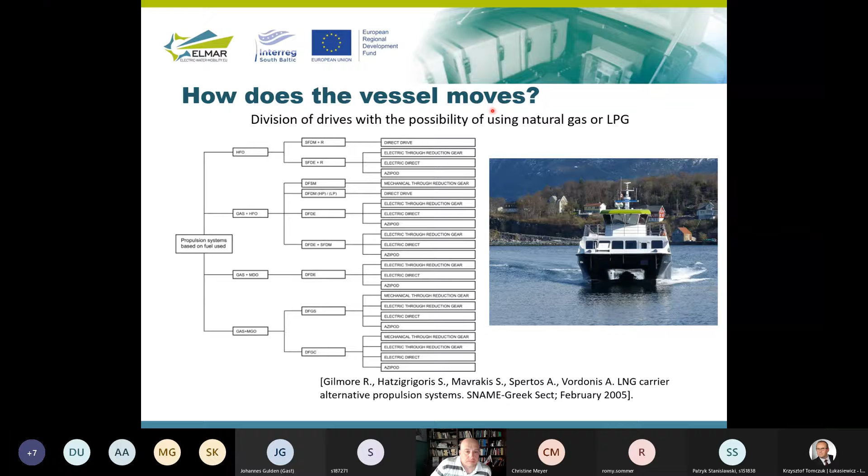So we see that there are three types of propellants. First of all is distillate fuel. This distillate fuel can be accepted in many special areas due to its low sulfur content, because sulfur is one of the most critical factors. Of course, this distillate fuel is far more expensive than heavy fuel oil.

So it must be adapted and introduced by law regulations. It's not like ship owners will say, yeah, it's better, so we will use it. No, we have to force it somehow. And this distillate fuel can be used in special areas like the Baltic Sea or North Sea.

The other option, of course, is using liquefied natural gas, LNG. LNG needs special handling, gives pretty good energy concentration, but must meet many other technical issues to handle it, and of course it meets the current IMO levels of adoption, called tiers, regarding nitrogen and sulfur oxides. And the third option here is heavy fuel oil, HFO, with some special treatment.

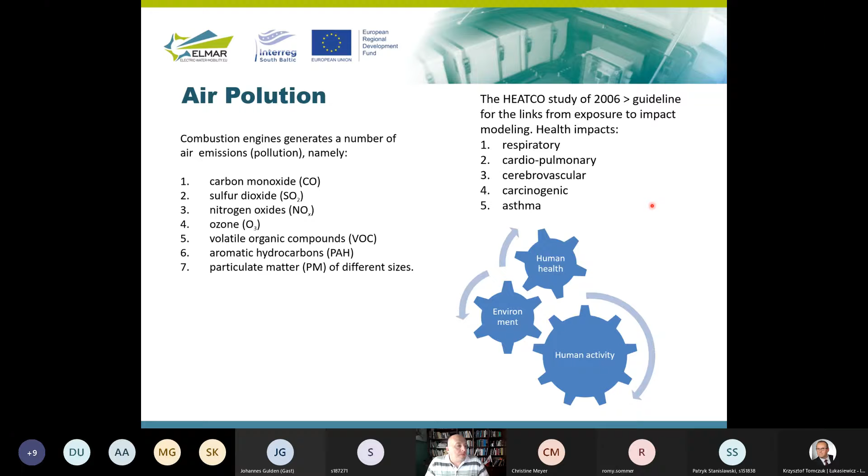And we are also dealing with the loss of environmental cleanliness. I believe all of us heard about PM, particulate matter -- very small solids inside the fumes. There can also be ions or reactive gases. Some of them can even be radioactive, some metals and carbon cores. So these are really nasty things.

We actually generate them using our facilities -- power plants, incinerators, etc. We generate them in any kind of typical engine. There are two classifications: below 2.5 micrometers and below 10 micrometers. For us, both are pretty dangerous, so we can say it's pretty problematic.

We know that in modern diesel engines, in road vehicles, we deal with them in many ways -- we've got EGRs, dust collectors, etc., DPF. These are the things that must be addressed also in shipping.

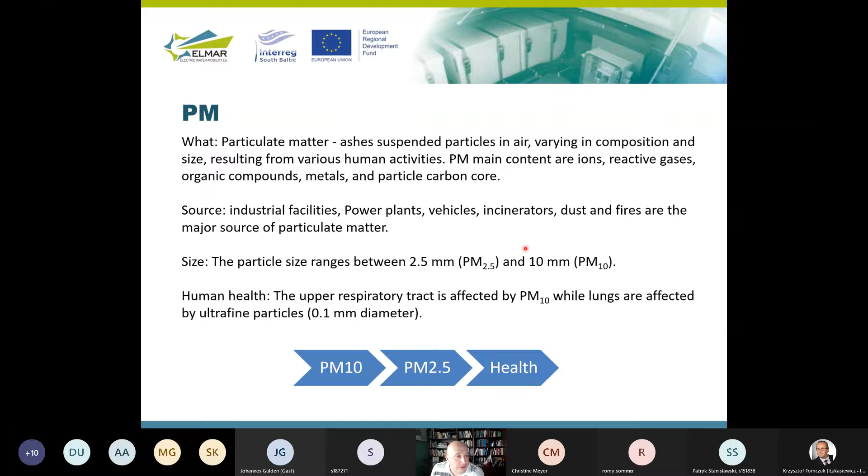What are the impacts on the environment? Here we've got the Canadian agency that has collected all of the impacts taken from fossil fuels to the environment -- what we do to our environment when we use the engines. I don't think we need to go through all of these elements, but you can find it here.

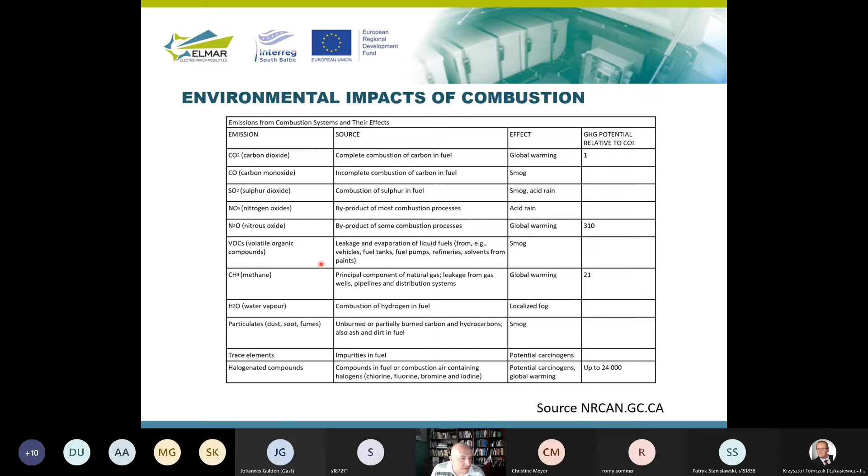First of all, of course, apart from our health -- we are inhaling this into our bodies -- we get global warming from the CO2, smog, acid rains, and global warming again from the nitrous oxide, and different things that can affect us. What are the sources? Of course, here we've got the sources: the carbon itself, the hydrocarbons, content of sulfur, so we can avoid it. The temperature of the combustion is also a factor here.

Who is the largest emitter of greenhouse gases in maritime transportation? Actually, it all depends on the size of the fleet, and we get the fleet of Panama, so it's the largest player, then Liberia and China. All others are, of course, 65%, but these are the three key players now.

Of course, Panama and Liberia are so-called cheap flag states. So they only have the vessels registered there, but the owners are, of course, not residents of Panama or Liberia or Bahamas. They are residents of Europe, residents of the US and other sides of the world. So is it like that Panama is responsible? No, Panama is just the flag. So we have to take care and address this. IMO got a huge problem with these cheap flag states, after it has been shown that the owners of the vessels are somewhere else.

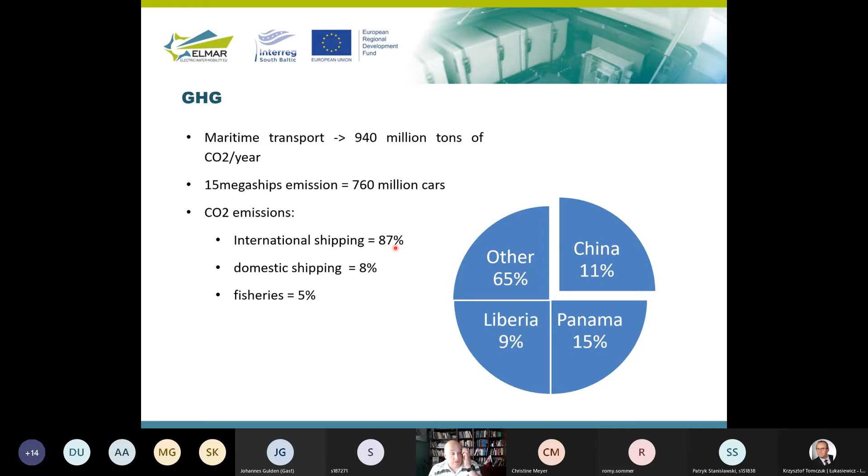What MARPOL measures are introduced? First of all, EEDI, the Energy Efficiency Design Index for new ships, and it is mandatory on the energy efficiency level. But for existing vessels, because most of the vessels in international trade are existing, old ones, they got something called SEEMP, the Ship Energy Efficiency Management Plan. Here, both new and existing ships must comply through operational measures. So also meteorological routing to spare fuel, optimizing the draft, speed optimization, and of course calling, entering the port in the proper manner.

Also, the efficiency of transportation, as I already mentioned, through the water is the most efficient one. It's the most efficient despite the high emission from a single vessel, because one single vessel can have thousands of containers inside. So this transport efficiency in grams of CO2 per ton per kilometer is the best one. The least efficient is aviation.

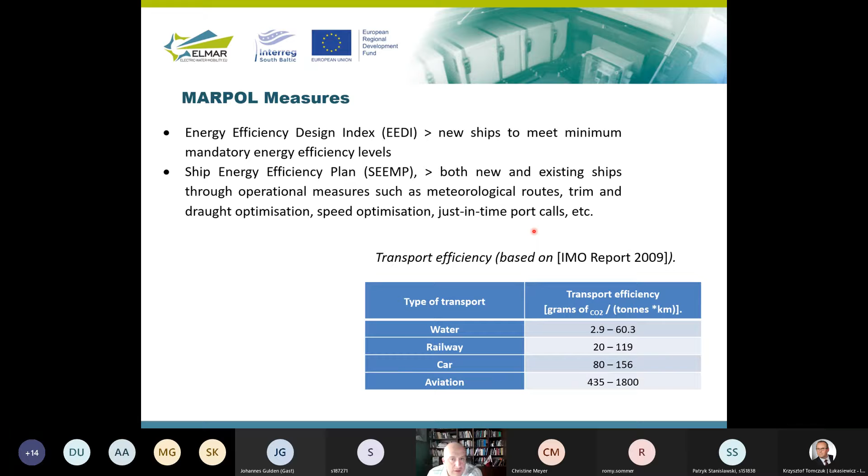MARPOL action to reduce carbon intensity is, of course, introduced for new vessels, as we already said, and for existing ones. This action is to reduce CO2 emissions per transport operation on average by at least 40% by 2030. 40% by 2030 is a really huge number, and most specialists say it might be done, but this is just might. And going to 70% by 2050 in comparison to 2008. So it's a really huge number for the environment. If it will be achievable, I have no idea. We will see. Greenhouse gas emissions to be reduced by at least 50% by 2050. This is also a really big number.

What can we do? Of course, we can introduce cleaner fuels. One of these is natural gas, which is nearly pure methane. It produces less nitrogen oxides, sulfur oxides, and PMs. It has less hydrogen and carbon than diesel fuel, so these emissions are also lowered. And the amount here is also related to the combustion. LNG or CNG has a lower price per megajoule, so it's more energy efficient. But storage is a problem, for long distance vessels in international shipping it can be a big problem.

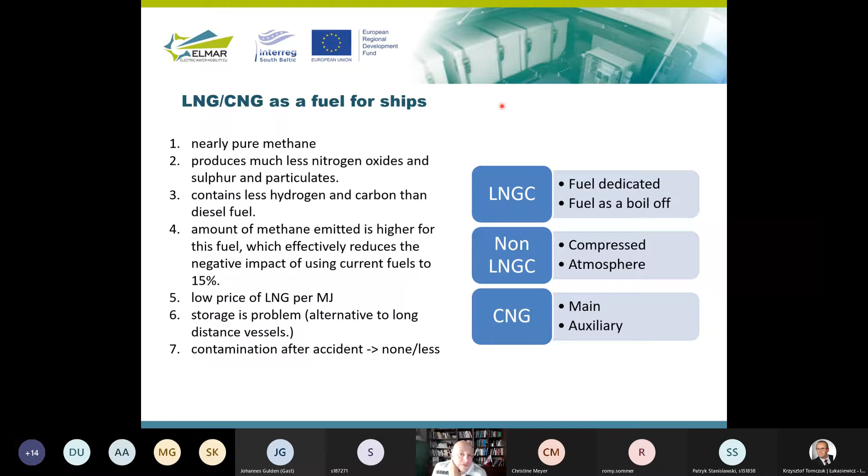What can we expect from LNG? We can expect, especially, PM reduction at the level of 90%, greenhouse gases around 25%, NOx around 20%, and SOx nearly 95%. So it's really clean fuel. Cleaner engines, cheaper maintenance. These are the biggest advantages.

Output efficiency, easy storage. Maybe not an issue here, because it's not that easy to achieve the easy storage actually here, and pretty fast refueling, fast and clean.

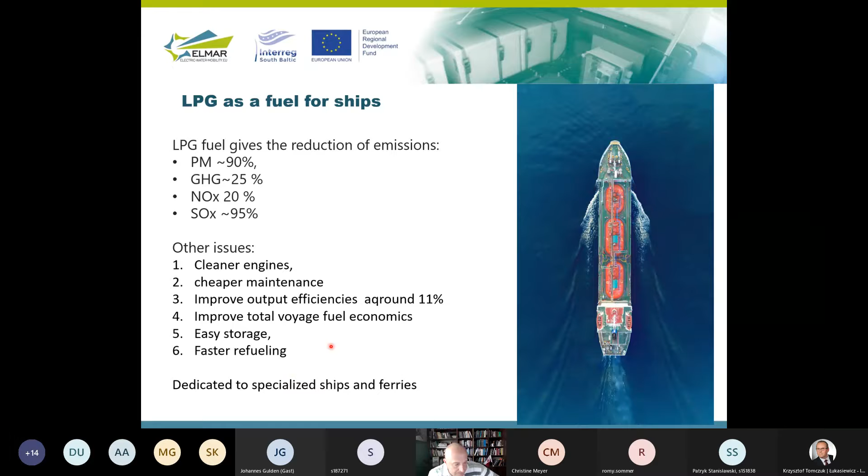Another type of reduction measure, I would say, is using biocomponents inside the diesel. So we are not using something that is purely made by the plants, but it's just an addition to the diesel fuel. Of course, the diesel fuel cannot be heavy fuel oil. This must be some kind of marine gas oil, so a very light one, or marine diesel oil, so also lighter than the HFO.

So we got a few methods of additions. So the bio additions, we got fatty acid methyl ester from the different types of natural oils, which also can be used here, and this marine diesel has an appropriate ISO standard up to 7% in volume.

Also, two different methods. So the BTL can be also used for the diesel engines. Different type of processing, and HVO, vegetable oil here, also can be treated inside the marine diesel oil.

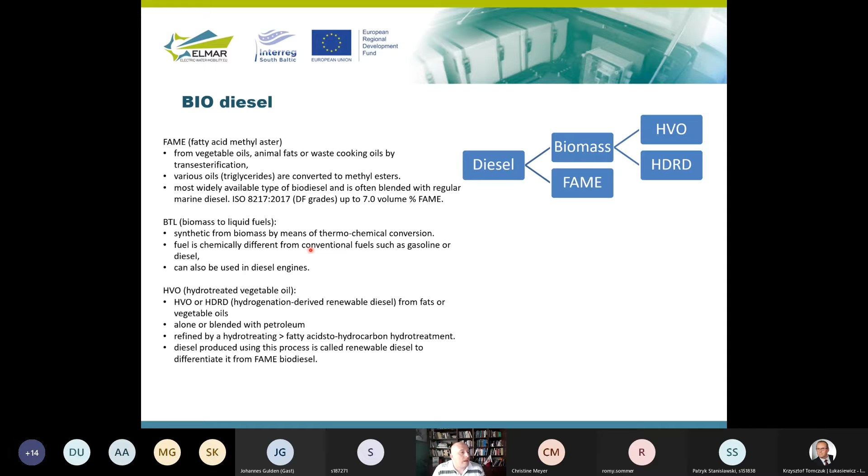But nothing is for free. We got some disadvantages and some challenges, I would say. So bio additions are more reactive. So in high concentration, they can react with some types of gaskets and different alloys. So the designers have to take care of it.

Problems because these are natural things. So we can have some microbiological growth and different problems here, and degradation of it in due time far faster than the typical diesel oil. Also, corrosion here is another issue we need to address. And the low temperatures. So not every biofuel component can be used in low temperatures, like Arctic shipping and our areas when it's cold.

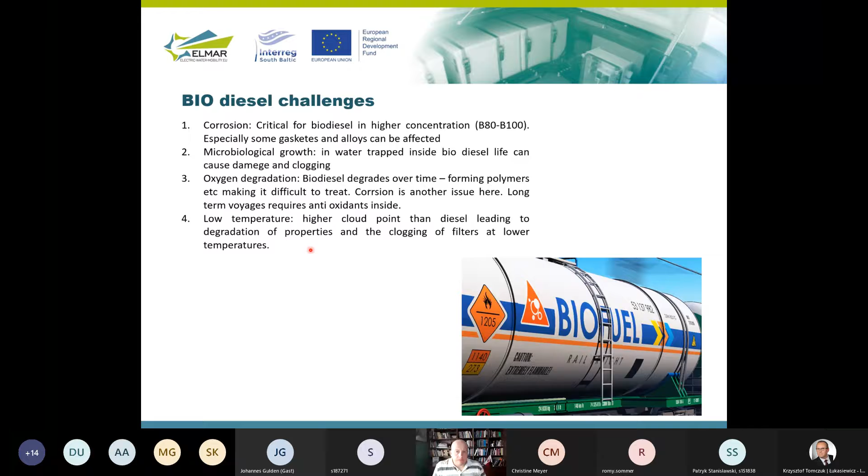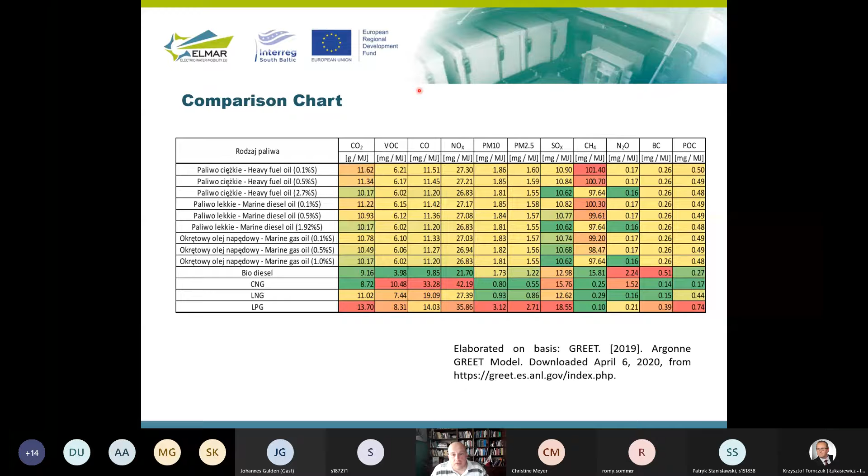Something that we did not address was LPG, so liquefied petroleum gas. So a compound of propane and butane, because it's a standard that was not actually very widely introduced. There are some vessels propelled by LPG, but these are not standard because they do not meet many emission types, and it's not that common.

So going into some discussion, we have to look at the LNG fuel. So LNG fuel, is it something that will become a large player? This is the question. It's rising in many sectors, but still a very low amount of vessels are propelled by LNG. LPG, as I said already, is a standard that was not introduced.

Biodiesel is a good idea, and it adds a lot of advantages to cleaning the environment. It has some issues, but still biodiesel in large engines can be successfully introduced. And problems with the legislation. So at the very beginning of this presentation, I already mentioned this problem. So the international regulations, then the national regulations, and then we got a lot of regulations.

But is it really something that we must obey? It's a question. Of course, the international regulations must be met, but if there are too many, then of course it's not really wise for us, and it's not really feasible for us to deal with.

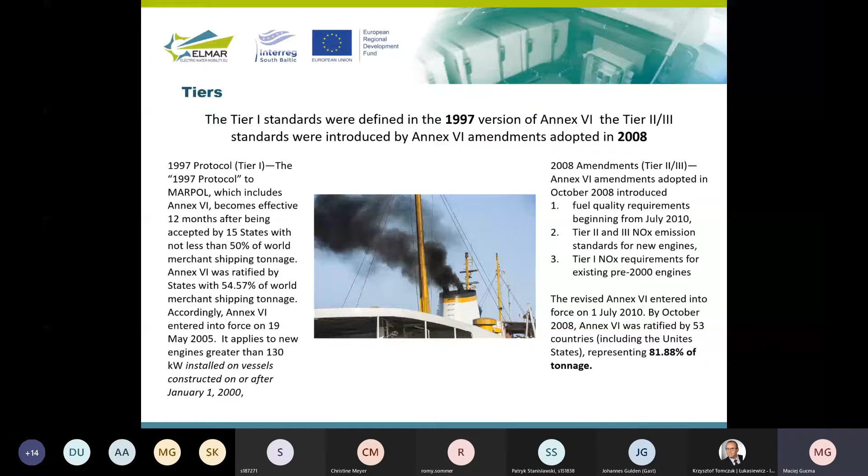Okay, so what are the emission control areas? I already mentioned this in the previous presentation, but the emission control areas are defined in Annex 6 of MARPOL. So these are local areas, the local waters of some parts of the globe, where stricter requirements are applied to the vessels in case of any emission.

So these ECAs: the Baltic Sea was really early adopted, one of the first basins. We all know, because we live here, how fragile the Baltic Sea is. So we have to really take care of it and share it with our kids in the unchanged state. So this is the idea. SOx adoption was really early, in 1997, in 2005 it was enforced, and NOx is entering now.

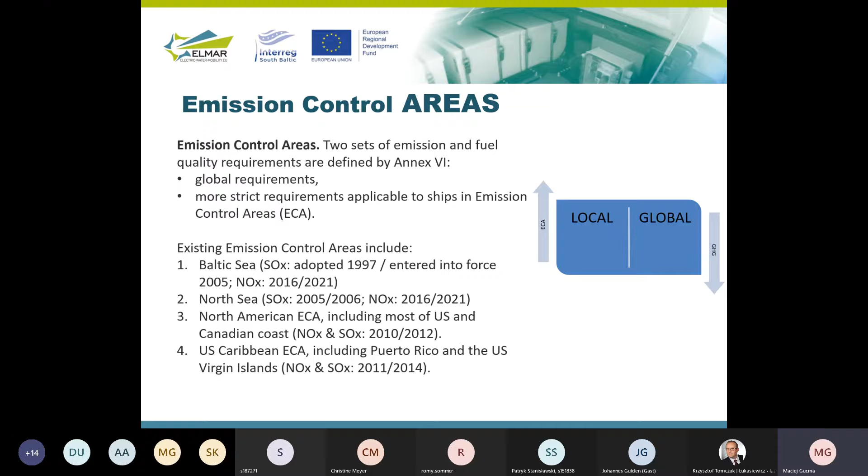Similarly, it's for the North Sea, also North American, they got ECAs for the US and Canadian coast, and the US Caribbean ECA is of course introduced by the US because it's their territory, Puerto Rico, Virgin Islands. The global concept is mainly lowering the greenhouse gases emission.

We got the greenhouse gases regulation on the efficiency for ships. We already touched it in the previous presentation. These limits apply for diesel engines with power output of more than 130 kilowatts. So this does not affect the really small leisure crafts. This is more for trade and shipping. But of course, the countries themselves can introduce stricter regulations for shipping and for leisure craft.

Is it okay or not? We will discuss it at the end, maybe.

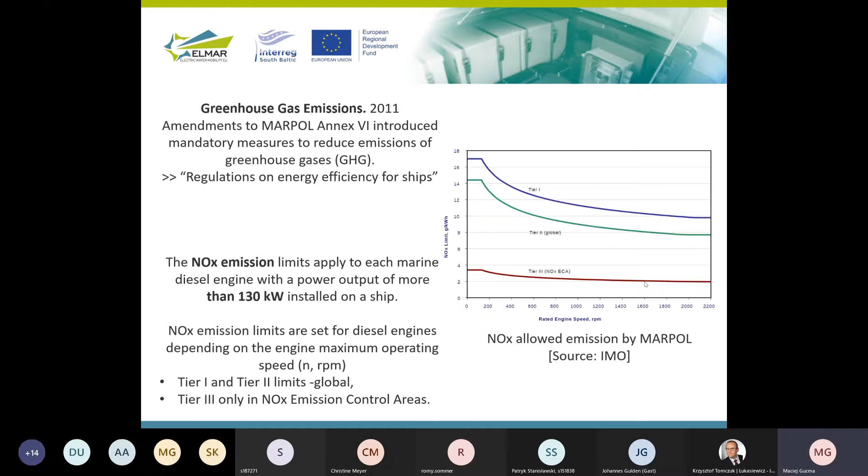How can the sulfur oxides in the fumes and sulfur in the fuel be lowered? First of all, using marine diesel oil. Distillate fuel is far more expensive than heavy fuel oil. And second is scrubbers. So we also talked about the scrubber, the exhaust gas cleaning system. And 0.5% is our target.

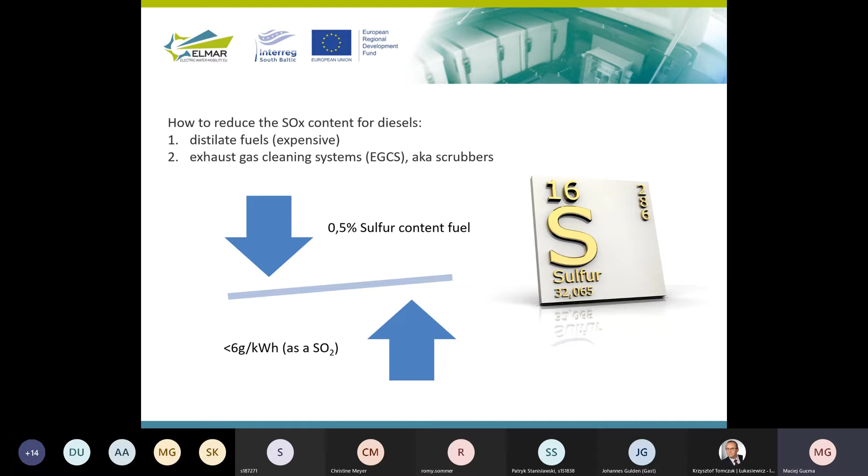So what we can do from the technical means: large combustion engines are dealt with solely by MARPOL, with a scrubber or conversion to another fuel. This conversion, of course, requires a lot of changes for the big engines. Converting to LNG is a big challenge. So these are the large engines.

Medium engines, around this 130 kilowatts, can be affected by both MARPOL or the Euro standard. We got Euro 6 versions now for the new engines, and here we might assume that the typical solutions from the automotive branch will be fine, like EGR, exhaust gas recirculation, DPF, the particle filter, and other cleaning means.

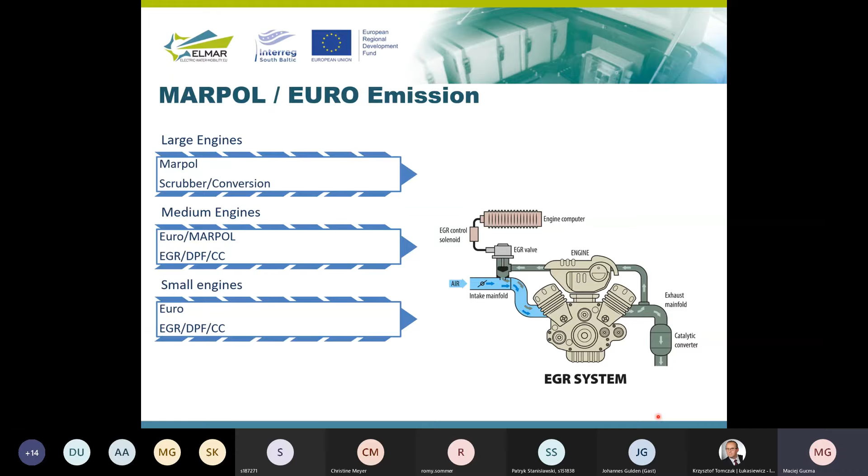EGR valve here, presented as a mixing valve, so anything that can be found inside the exhaust gases here. I will just show exhaust gases here. They are combined with the intake air to the manifold, a system known from the diesel engines in cars. And of course CC, catalytic converter, as a purification, the simplest system we can have now also in diesel engines on smaller crafts.

What we got for the emissions, we got SOx and particles. SOx and particles are treated by the DPF filter, so this particulate filter that must be cleaned occasionally, like in the cars. Diesel oxidation catalyst, so we get this catalyst. Of course, we are not discussing here the marine gas oil. So I would say that the light fraction of the hydrocarbons here are not taken into account, only diesel oils. And the third one is continuous regeneration trap, CRT.

For the NOx, we got this SCR, so selective catalytic reduction, pretty complex thing. EGR, of course, is helping with NOx emissions, just by recirculating them to the intake manifold. Non-thermal plasma, so another new means. And lean NOx traps here is the fourth option.

What were the tiers, the Euro levels, beginning from Euro 3, 4 and 5? We got this comparison. These arrows indicate the years of the introduction of each technology. So for example, DPF as obligatory means here reduces this level of NOx, for example. I recommend this article. Here is also the link for it. So any of you, ladies and gentlemen, interested in the details, this article gives a lot of details on these technologies.

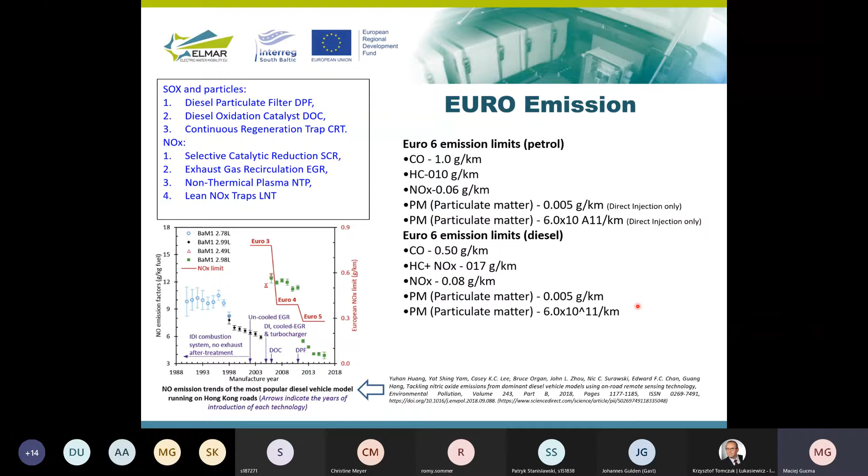For the Euro 6 emissions, we got the following numbers for the petrol, so for smaller engines, and for the diesel, we can assume these numbers here.

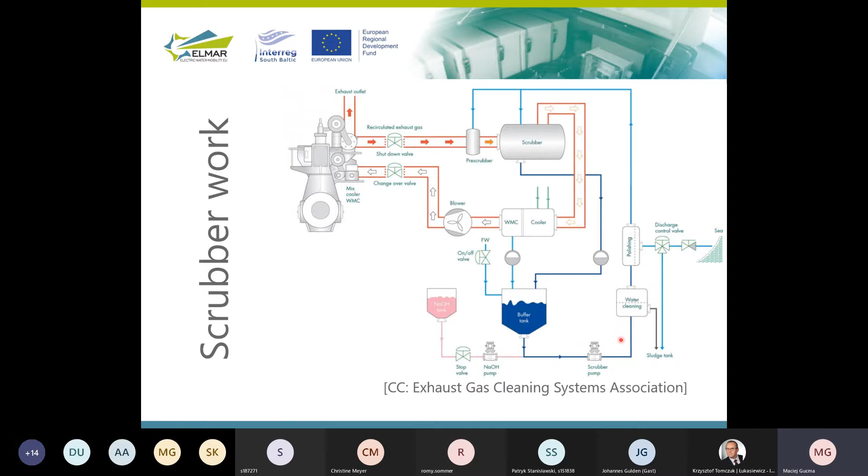Of course, as you can see, it's really complicated. Typical installation of this system for a bulk carrier of 80,000 tons is something like $5.5 million, which is a really big amount.

The proposed solution, of course, is a change, not going a step back or standing in the same place, just using some purification. But of course, the change we have also got in our discussion. So from diesel to LNG or hydrogen. These are the possibilities. Using fuel cells, or solar cells also for the smaller craft, is an option as well.

Pure electric ones must be somehow charged. And if we remember the first presentation, there was a comparison between energy production and transportation. So if we produce clean electrical power, that is really nice. But if we produce this power from coal or from gas, etc., it's not pure. The level of environmental impact is the same. So maybe it's a bit harsh, but we always have to think, where does this electricity come from?

And biofuels, as we already discussed, have some advantages. They can be used, but they're also not the best idea. LNG reduction, we already got it. The possibility of retrofitting engines is not cheap. It's not like we will just put in storage with the LNG, set it to the injector, and we will have the retrofitting. Not all engines can be changed. Not every single construction can be changed to LNG. Sometimes these constructions are pretty old, or they are just not feasible to be changed.

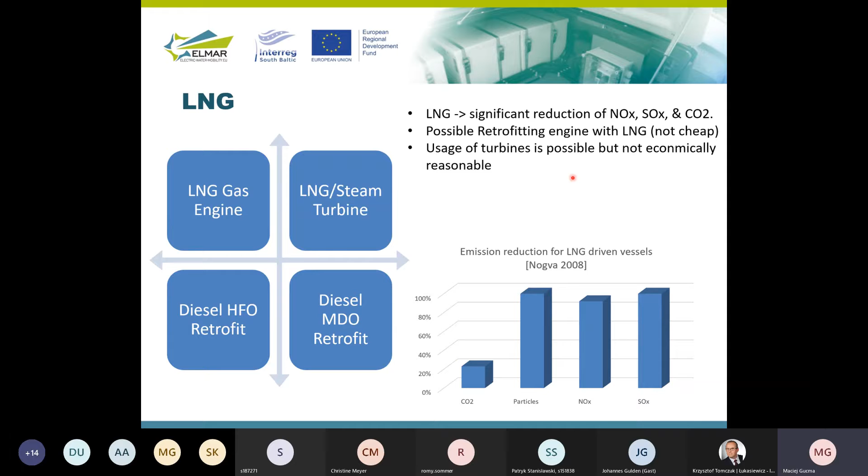LNG sources. So we have storage, some gas station. It must be done locally. Problematic. Many different things must be met to store the LNG locally, in some kind of gas bunker station. Another option is, of course, bunker barges. Bunker barges, so a small vessel with LNG inside its tanks, can just moor to the vessel propelled by LNG, and then it can be bunkered, like typical bunkering done now for vessels driven by heavy fuel oil.

LNG trucks only in ports, so this is done now. Our terminal Świnoujście is exporting hundreds of trucks with LNG, not only for vessels, of course, but also for typical installations, houses or facilities. And so this is the missing link. If we didn't have these trucks, driven, of course, by diesel oil, we would not have the advantage of LNG propulsion for the vessel, because there would be no facility.

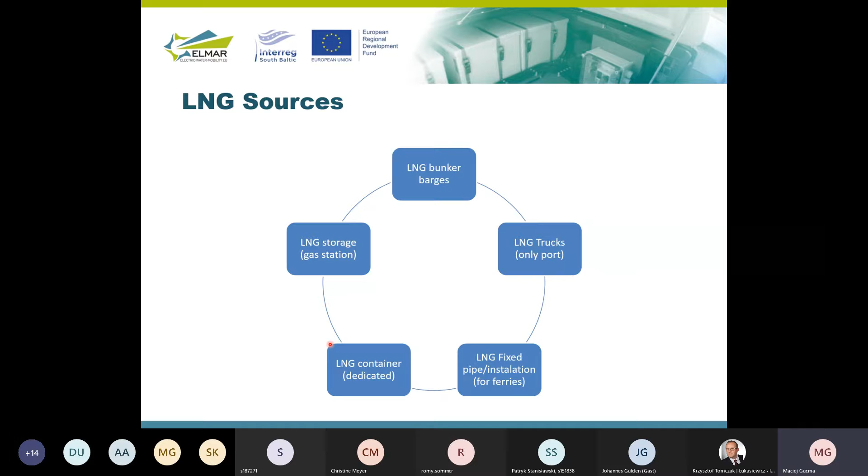Fixed pipe installation is only feasible for ferries. Sweden was the first country to introduce this. It is not feasible when you don't have a ferry, I would say a tram or bus going through the sea. And LNG containers, special containers that can hold the LNG inside for many days, are also a new technology, and it's rising now.

Hydrogen. Okay, so we skip from LNG to hydrogen. Hydrogen itself requires diesel forced injection, so the addition of hydrogen to the diesel. Another option is hydrogen/air mixture injection, and pure hydrogen gas engines.

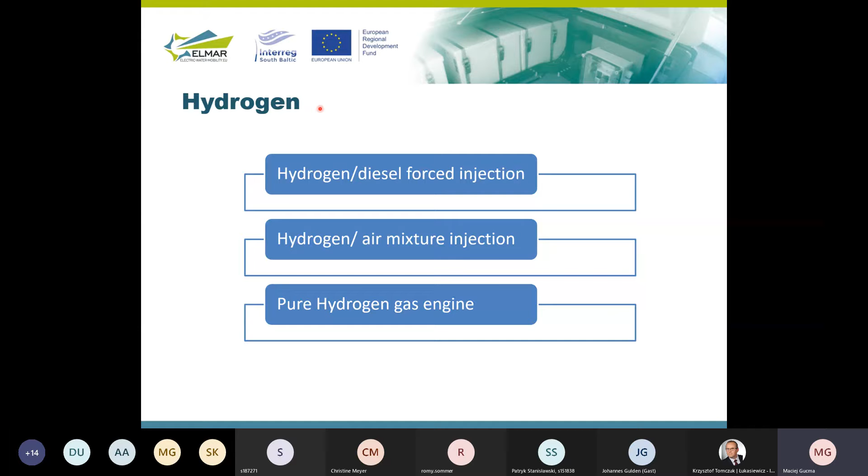The questions here are, of course, durability, safety of storage, performance, and cost. Scientists are building larger and larger fuel cells. Different technologies are emerging, so it's an open question if it will really give an advantage to our propulsion. Solar power is nice until you have power, of course, until you have sun.

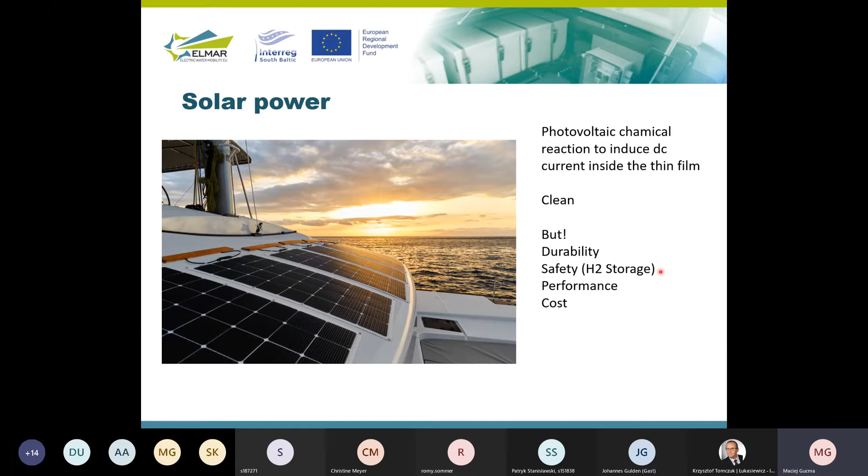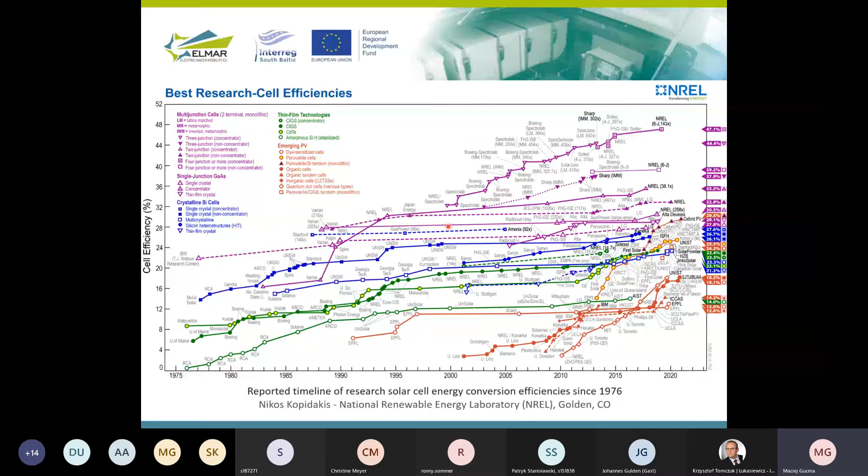What are the cell efficiencies? We can see the big giant leap, I would say, was done from the early beginning of this technology. Now the cell efficiency is rising up to 47%, so it's really high, I would say. This comparison is also very nice for students and researchers that would like to see the promising technology in this photovoltaic types of generation of power.

Pure electricity of the grid, again, nice, clean, looks good, no fumes in the place of using the power. Again, the cost of accumulators and batteries, the safety of storage is a question. Technology of storage is a question, and where do we take this electricity from? This is the largest question.

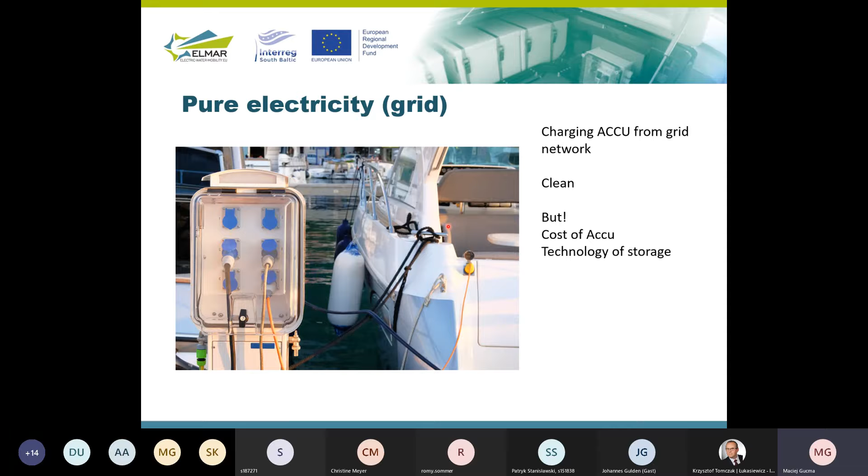Biofuel, we already got, I believe, at some point. So adding this methanol to the engine is another option. Biofuel and then methanol or esters to the engine is another option. Some reduction is met, but we're still in the same point, still in the point when the internal combustion engine is used.

So the discussion here is, of course, the features of the MARPOL requirements, small engines, Euro norm versus MARPOL. LNG, is it the fuel of the future? Maybe no. And electricity, yes or no.

We prepared some references here, so I encourage you to study them in original. A lot of files and resources can be found on these pages and papers. From my side, I believe that's all on this topic.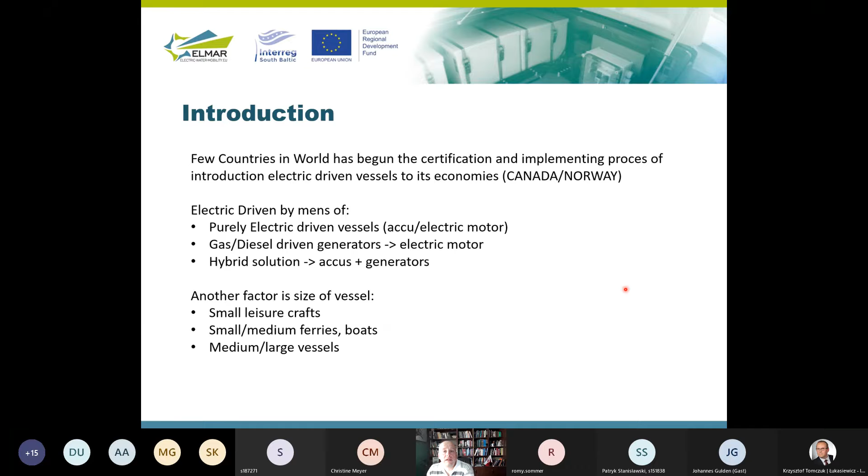Scope - we were considering with my co-authors how to scope this issue, because if you've got MARPOL, you have to scope it, because we are signees of the convention and we have to follow MARPOL, so there is no choice, fortunately. But how to scope the electrical driven aspect? Because many different parties say, yeah, you have to try, seek, and then do it. Mainly we are here now because of this action, which is really brilliant and desired. But what is the scope? The scope is pretty simple.

If you live in a coastal area or on an island, you have to depend on the ferry for transportation. If you live in a country that has exchange with another country through the sea, you have to depend on transportation of containers, goods, bulk cargoes, etc. Living in this coastal area or island can be the triggering action to see if it's possible to lower the pollution from exhaust fumes and gases inside the port. Even small vessels, but in large amounts, like Amsterdam, which Krzysztof already mentioned, can induce a lot of harmful substances inside the port, and then living standards will be lower, which we don't want. We want to live in a clean environment.

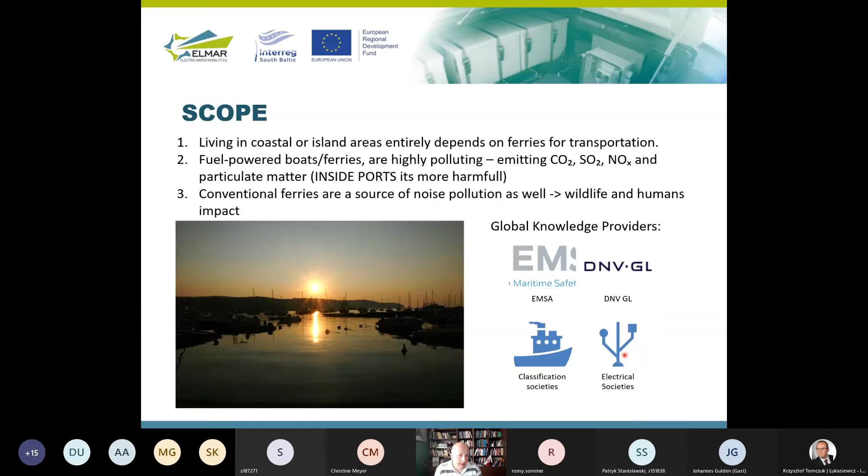So what can we expect on this EMSA cost benefit matrix? This is a really valuable source I already mentioned. The basis is using pure electric energy in the way it's done. So what are the savings for the vessel if we switch to pure electric energy?

EMSA together with DNVGL found out how to show the potential of saving fuel, when the payback will happen for this retrofitting and changing, what are the main considerations for the batteries, and then what are the main factors for maximization of this impact. Not every vessel can go into 100% saving - some of them are pretty low amount, I would say.

But again, the ferries are the biggest players here, and the relevant vessels like high-speed ferries and similar are the key beneficial here. But other vessels as well, so it's not only the ferries.

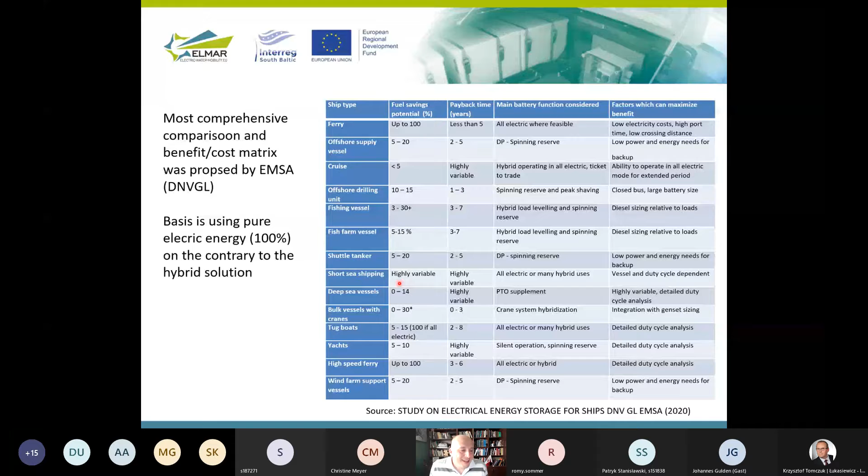What we deal with in batteries is a balance - the balance in power versus energy. Of course we all know that it's more or less we can find this energy consumption rate, and this can be optimized somehow.

At my university, we are dealing this for the small leisure craft we built with the Aranet consortium with a Turkish partner, and it was really demanding to find the proper cells for the electrical driven yacht.

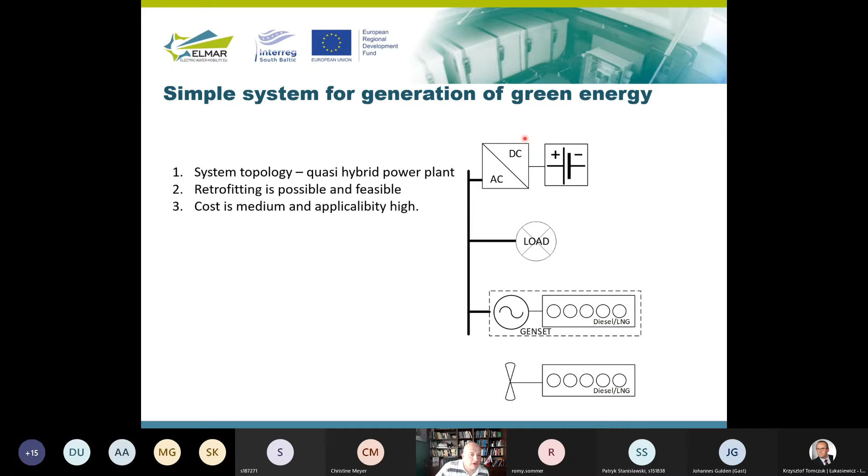Electrochemical sources. So the true hybrid, the real hybrid. So we got propulsion made from electricity. If we combine with this, the propulsion is made here from the diesel. So it's not for propulsion, just for conserving the power to the load. And here we got the propulsion made from the electricity, from the grid.

Here we got two segments of grid, we got two gensets, and we got two storages, of course additionally some loads, but here the grid is combined with the electrical motor, so the genset can be driven on a desired level of energy production. The load can be fed, and the batteries can be loaded at the same time if there is not high demand for electricity in the grid for the propulsion, which also can contribute to energy saving. Actually, I would call it eco driving.

So a hybrid power plant retrofitting is possible and feasible. A lot of vessels actually are using this side. If we just use this part, then a lot of vessels are driven like this. In the first presentation, we got this topology mentioned. So retrofitting is possible and feasible, but the cost is high. Applicability, we call it medium.

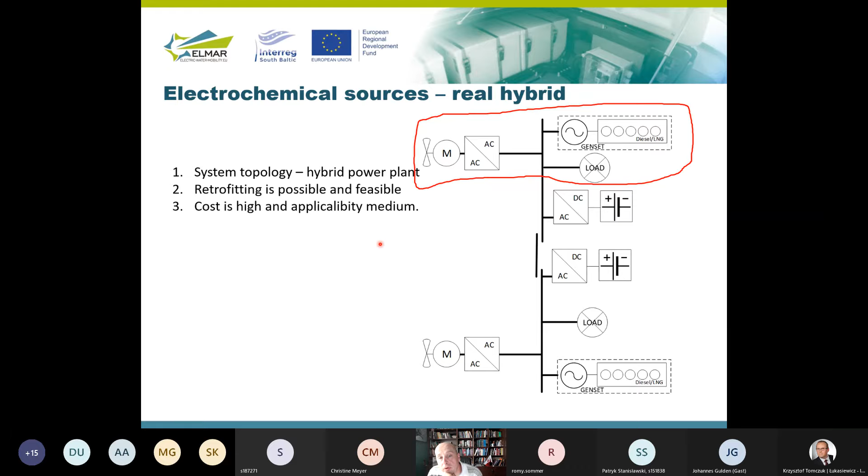Another option: having fuel cell in line. An idea also driven from the DNV GL. So this hybrid power plant is fed again from the genset. We don't have the batteries here, but the genset is driving the electrical motor. This is additionally supported, I would say, by the fuel cell. Hybrid power technology retrofitting is demanding. It becomes demanding because of the fuel cell.

But again, this part can be existing, and it's met on the vessels. We got costs at the high level. Some losses in generation can occur because we don't have the place to store it, and it's feasible for specialized vessels like DP operational, some standby tankers, etc. It can be feasible to have an additional fuel cell in this segment.

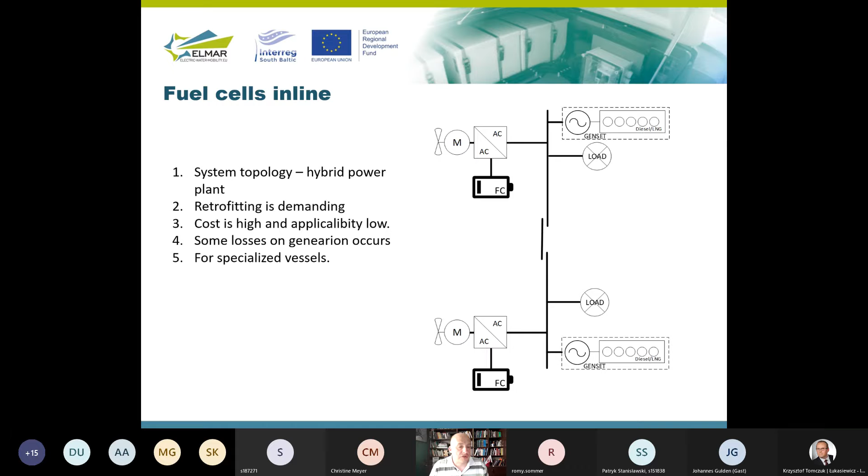And adding a fuel cell as an additional segment in the grid gives more advantages. We still don't have the possibility to charge it, but we can of course combine these segments together and use only one engine for eco driving, for example. Retrofitting is possible again, but very demanding. Applicability is the same, so it's medium.

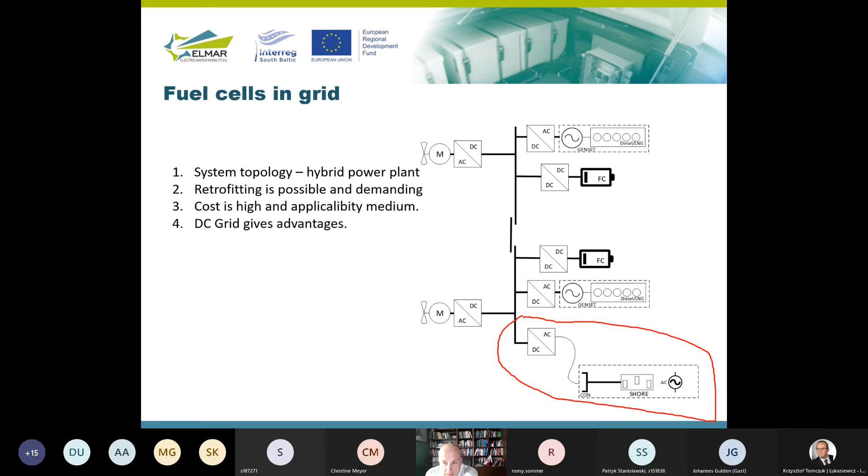But there is one more segment we didn't have there. It's the segment where we can connect to the shore, so using this fuel cell inline with the grid together with, not at the same time of course, the shore power connection.

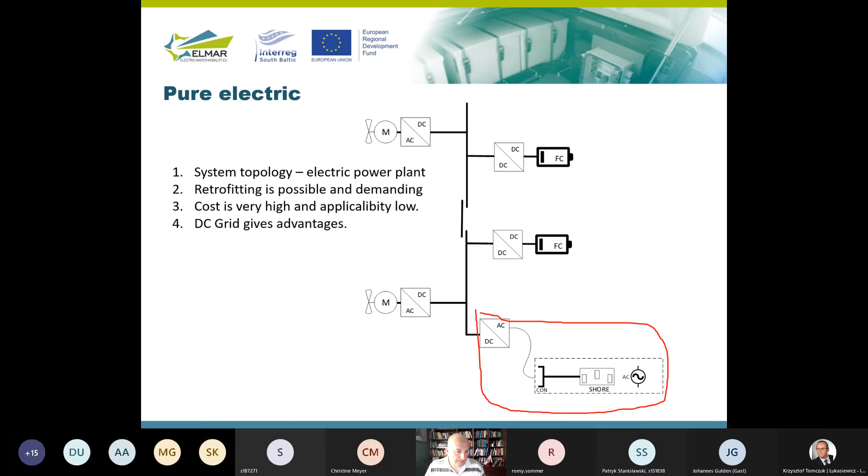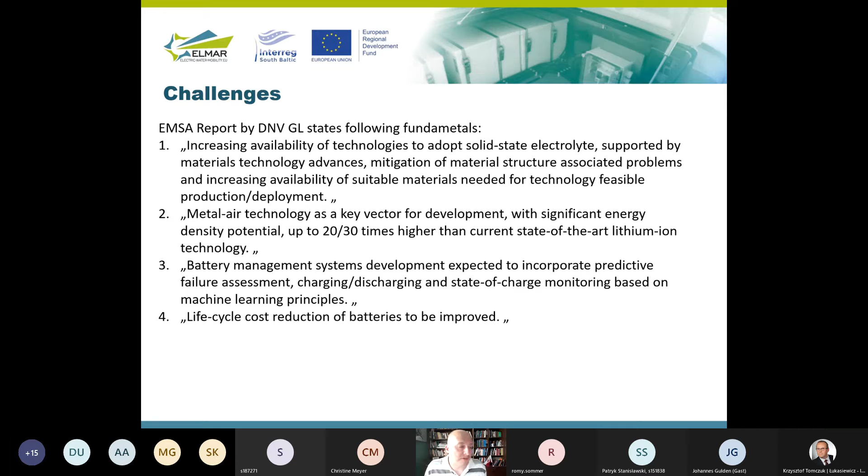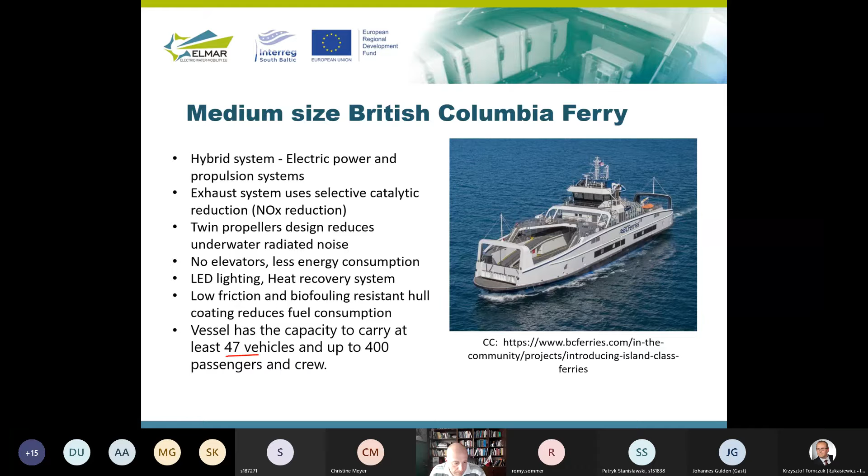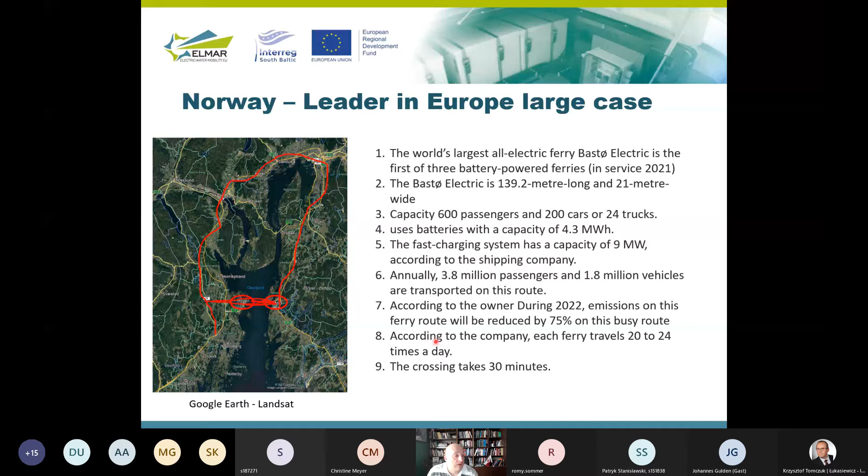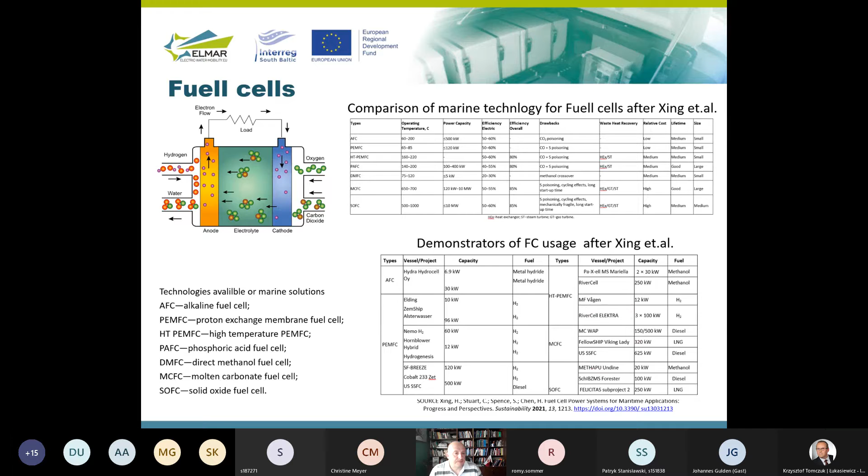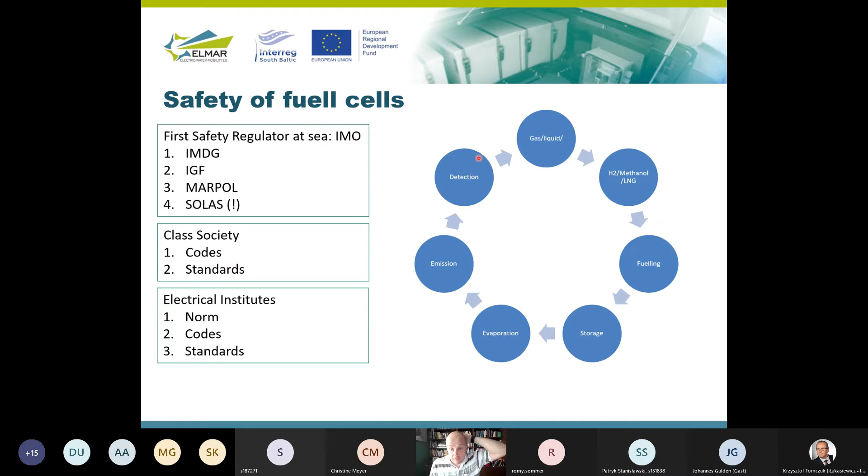So discussing, we can think about the fuel cell versus batteries. Accus, of course, constraints of the technology and our safety issues. These are the biggest things.

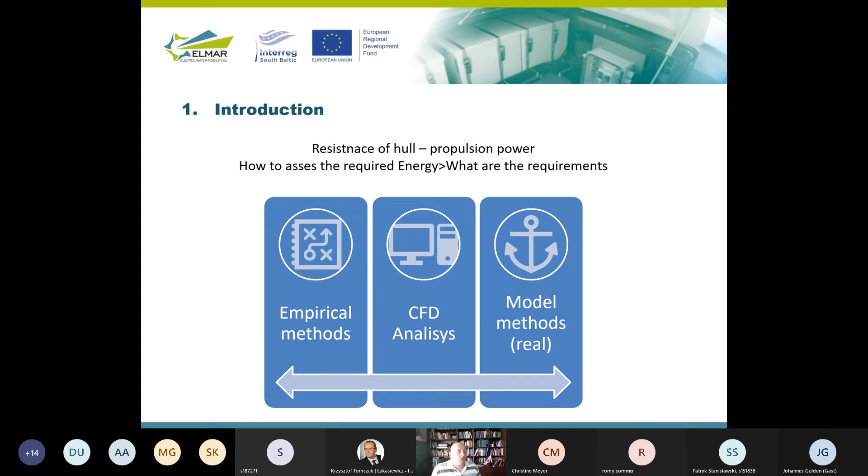These are the scientific methods we use. Sources of resistance in the vessel are, of course, hydrodynamic resistance. The vessel is the only transportation that is in between two different environments. The first environment is, of course, water. So everything that is under the water is hydrodynamically affected, but part of the vessel is in the air, so we've got aerodynamics here. So two things must be addressed.

Fortunately, for aerodynamics it's only the wind resistance, because the vessel is not moving really fast. Maybe fast hovercrafts have some issues with their own induced wind field, but for a typical vessel going up to 20 knots, we only have to deal with the wind resistance from the generated field. But underwater, it's not that easy. We've got wave making resistance, skin friction resistance, appendage resistance, and pressure resistance. All of these factors must be overcome by the vessel's own propulsion.

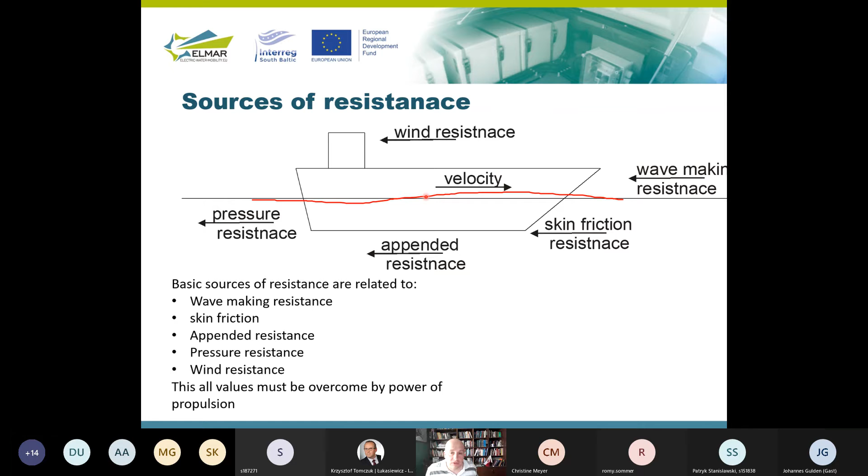Easy, simple, everybody knows it. Sorry for saying this, but I had to. Sorry.

Okay, sources of resistance from this planar view. We've got our hull inside the water. If we put the hull inside the water, of course the surrounding water will have to be somehow put away. So we've got this empty space occupied by the hull, and the moving hull generates the wave system. So first of all, if we move in this direction, we've got this vector for our movement, and we've got high pressure on the bow of the vessel in the front.

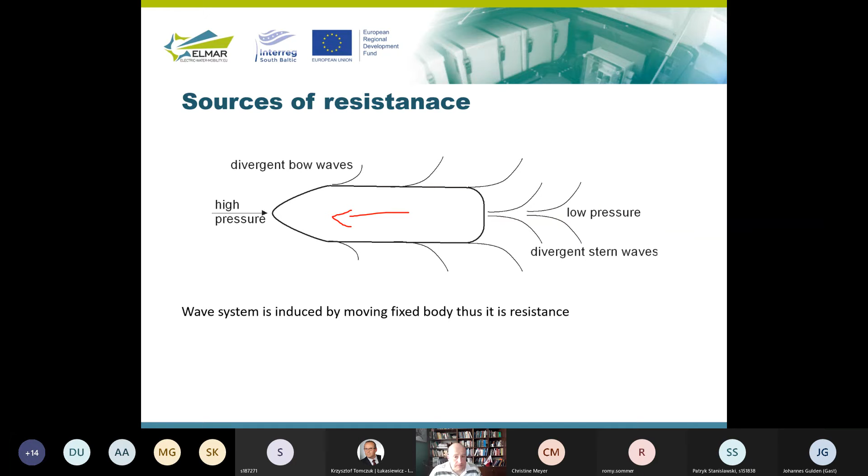And this high pressure generates the flow around the hull. This flow is inducing waves, divergent bow waves and stern waves, because of the difference of pressure, the high pressure and the low pressure here on the aft of our hull. How does it look? All of us who have sailed even small boats saw the waves induced by vessels. So this is the induced system of the wave resistance. We've got low pressure here, high pressure here, and induced stern and bow waves, symmetrically, if we move in one direction.

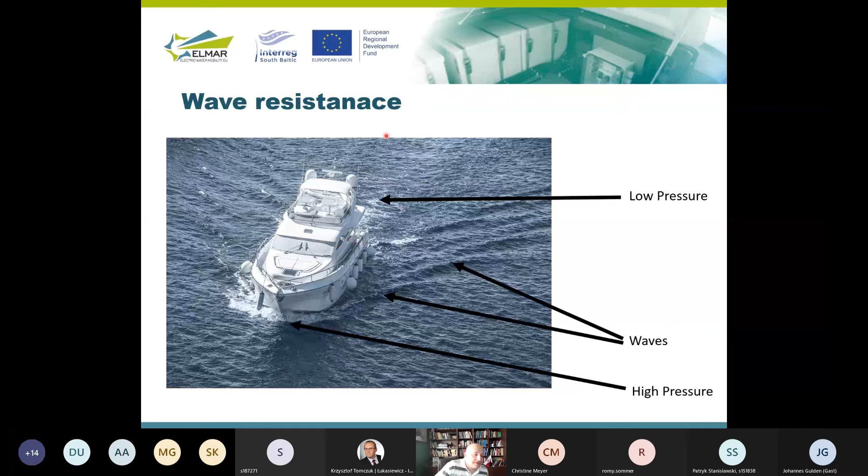So these are the main sources of the resistance, and what can be our measure to overcome this resistance? Of course, engines, any type of engine. A typical combustion engine, an electrical engine, or a hovercraft, because it doesn't have to be an engine working in water. It can work in air, or it can be any other type of propulsion. For example, towing is also some kind of propulsion added externally, but the resistance is still something to overcome.

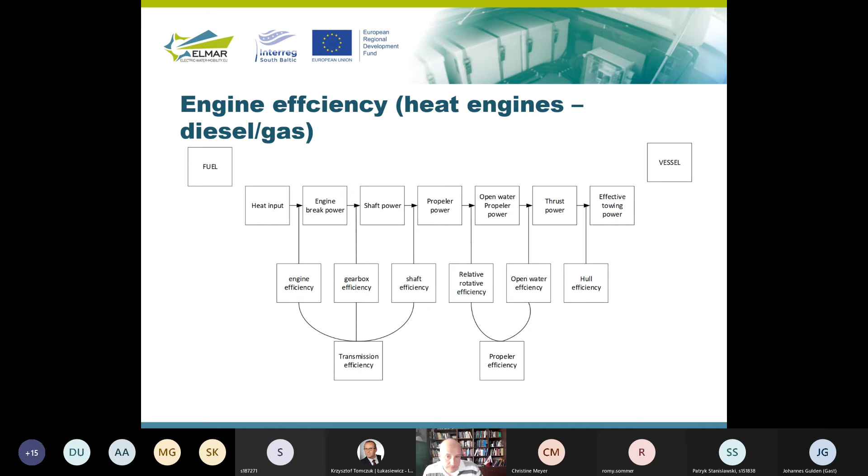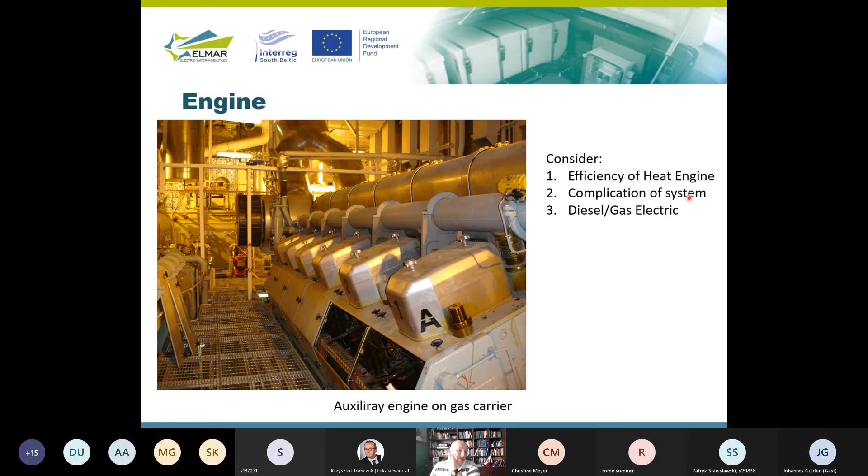So what we have to consider: the efficiency of the heat engine, complication of system is a factor, and of course what type of power it runs on. Not only heat engines in the way of the typical gas or fuel propelled engines, but also heat engines by means of turbines, gas turbines.

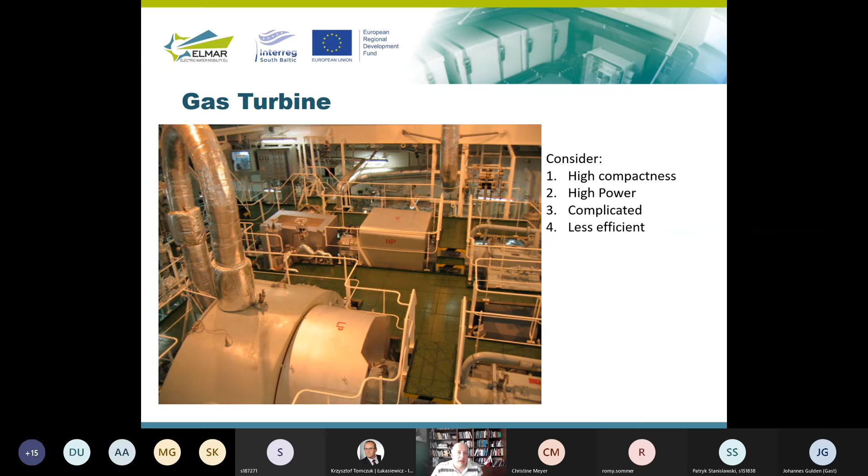If we look at the electrical driven motor, of course we got electrical energy generation or storage. So either generation or storage must be met here. Both three-phase alternating current or direct current. Also, any other ideas like BLDC or different concepts are found on different types of vessels.

And here it's simpler, but the overall is the same. So only this part is different. So this engine efficiency is different. If we got a gearbox, of course we have to deal with it. But the rest is pretty much the same as a couple of years ago. So we don't have these big advantages here.

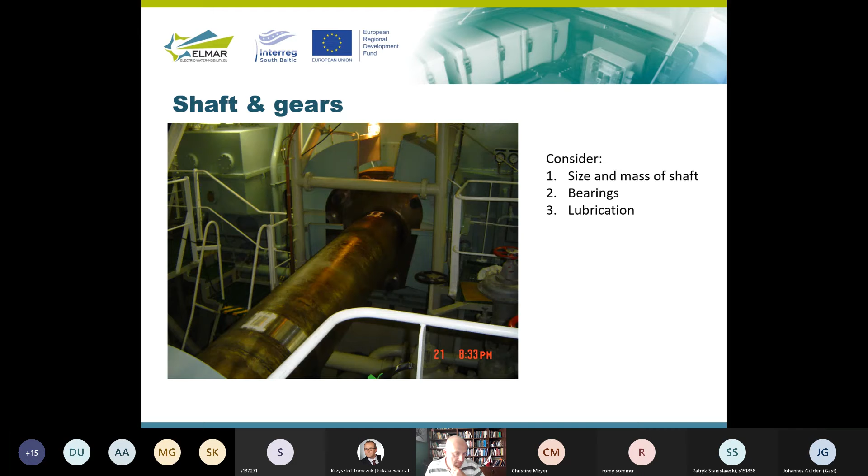Shafts and gears. So we got our shaft. How big a construction is it? It can be a really huge construction with big bearings and very heavy construction. Here we got the dismantling of the shafts on the LNG carrier, and as you can see, the production of this energy must be transferred to the propeller with really great accuracy.

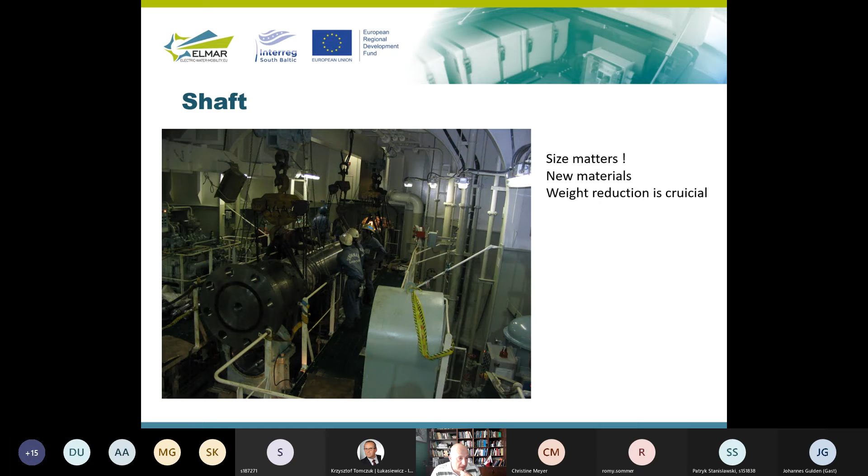So these bearings here that we see, the non-linearity was something like 0.01 millimeter for the whole length of shaft, like 25 meters or something. And of course the size is important, and then the weight is important. Afterwards, if we meet the hull, the shaft must be connected with the propeller. So the type of the propeller, of course, is crucial here.

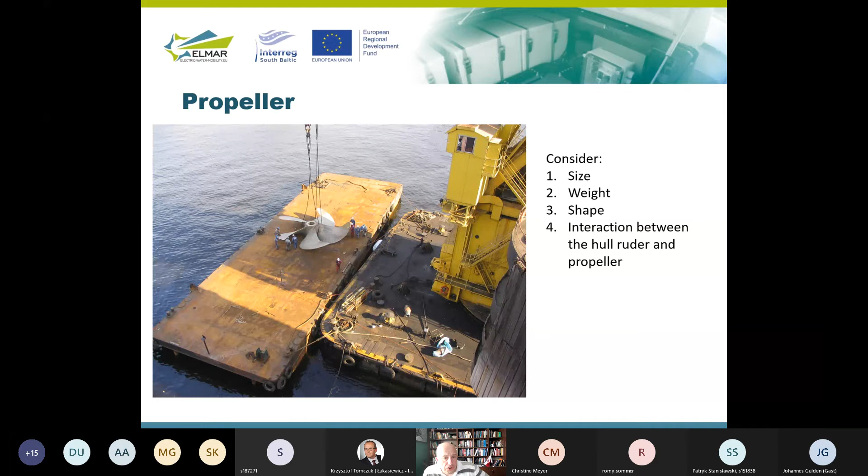Size, weight, shape, and the interaction, because this interaction is also for the steering of the vessel, which also is a crucial point and has a lot of consideration for the modeling. Here we see the large propeller during the mounting into the hull, to the shaft. I'm sorry. Then it was looking like this.

The precision of this shaft is really important, because we cannot have any imbalances here. The vibration can destroy the whole line, shaft and main bearing and propeller itself. Here we got the fixed blade propeller, so it's not moving. On many smaller vessels, they are moving, so they are controllable pitch propellers.

For the small crafts like 60 HP, for example, here the optimization is also crucial. Who is keen on motor yachting knows very well that this part is also pretty important. Now we got new trends like printing the propeller, so just changing the shapes of the blades, printing in very hard plastics or in metal is something that is now frequent.

So this optimization can be very much faster, because you just design it and print it immediately. You have the product. Before, you had to make the mold, make the casting, and then you got the product after some machining. Now it's simpler and easier. Type of the propeller, I just showed one type. There are something like 10 or even more different types of propellers.

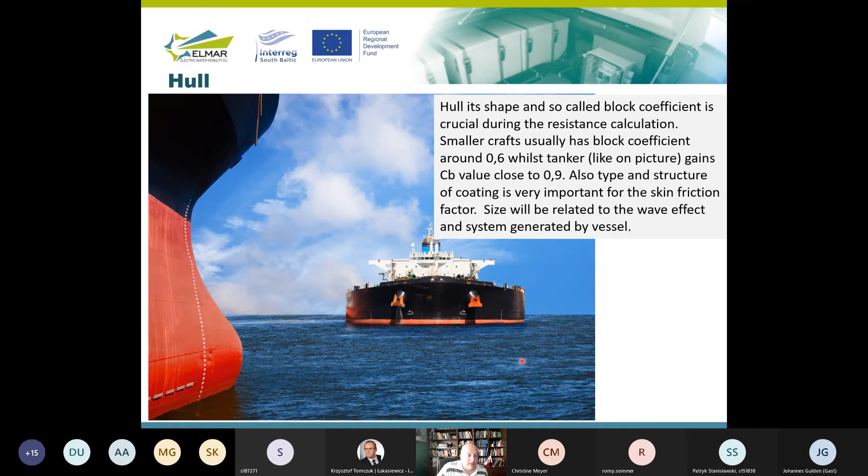Monitoring the energy consumption is really important. Even on small crafts, you've got some power monitor. You can install a desired level of power that must be transferred to the system - what is the power, the fuel consumption, the energy consumption, etc. These are all factors that must be addressed.

Also, if you've got hydrogen packs, you need to control the temperature - how do these hydrogen packs behave in different temperatures? These are things that modern automation can answer.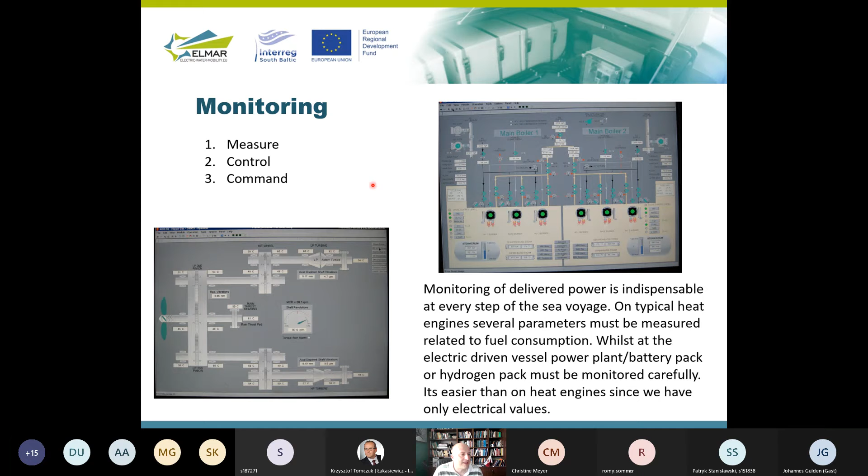So it's also very important. Common platforms - you can have platforms for many different systems, and transfer it to different points of the vessel, or just have the proper monitoring level for any kind of mismatches that can occur.

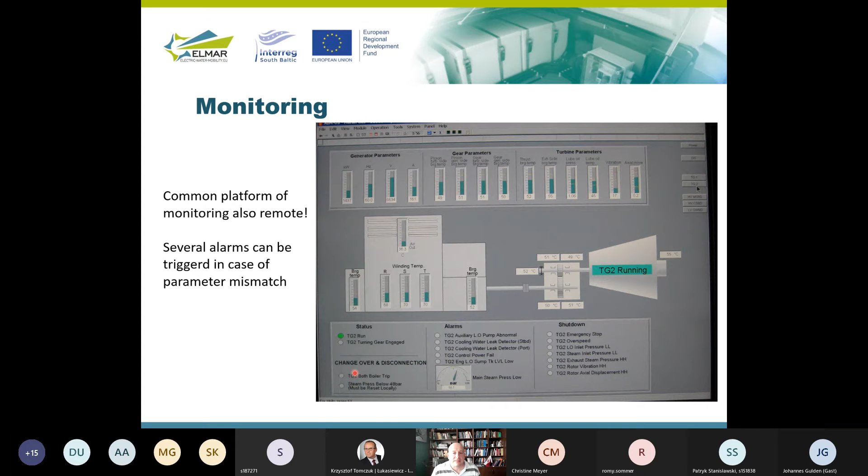So it's also a challenge for you as an ELMAR consortium, and for you as a future naval architect, to build better systems, more energy effective systems, better commanded systems, etc. It's a very complex world.

Okay, unfortunately - or maybe fortunately - we have to deal with this. Of course, when you've got the frictional resistance, we have a few calculations to be done here.

So wetted surface - since we deal only with hydrodynamics - is the surface that is normally immersed in water, and we've got two formulas that can contribute to calculation of this area, from Denny and Taylor, using appropriate numbers.

So we need the length of the vessel, length overall. We need this block coefficient I mentioned - the larger the coefficient, the more squared the hull is, looking from the planar view.

The block coefficient also gives us the idea how to deal with this hull for the hull beam - how wide our vessel is. T is draft, and displacement in tons, so how much weight is put.

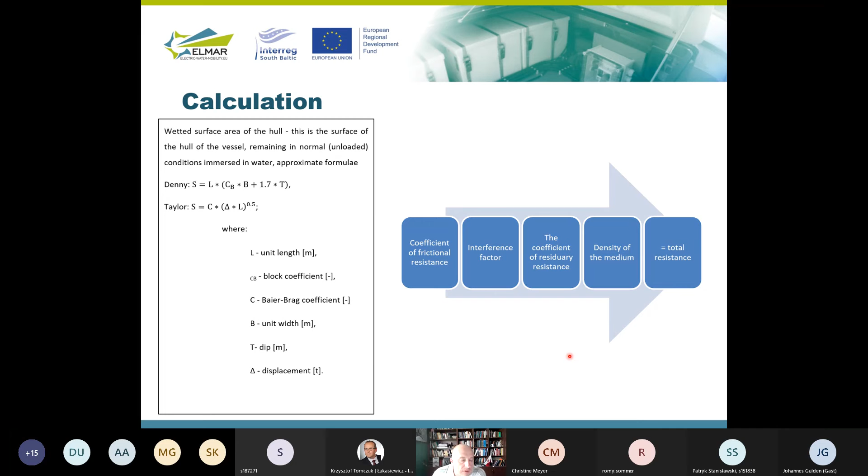This residual resistance also affects the total resistance of the hull, and the density of the medium. Of course, obviously, you've got different densities of water for different areas.

And with these simple formulas, as an output, we can provide for the ELMAR consortium some very simple calculation application that can address some types of catamarans, some single hull vessels, and relevant cases.

These calculations are pretty neat, and I believe after a few minutes of using Excel, you can calculate on your own this total hull resistance. So if you've got total hull resistance in kilonewtons, then you can have the idea of what is the desired input for the power you have to provide to your engine.

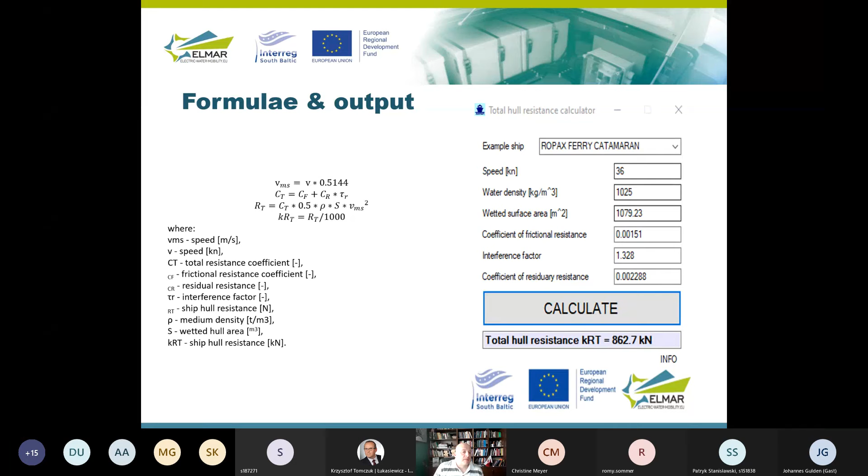Not to get too boring, the discussion so far has been about resistance, but we also have to deal with total resistance including aerodynamical resistance, where wind and weather may play a large role. As we know, the largest accidents and catastrophes, like the Estonia ferry or the Jan Heweliusz ferry, occurred in pretty bad weather, so weather is something we must address and cannot skip.

Power generation, meaning how power is generated from fuel or stored electrical energy, is crucial to know, so it's a pretty complex system. Efficiency, meaning delivered power versus output, is our efficiency factor here. Monitoring many different parameters with modern automation is often the answer to dealing with this.

That's all from my side. Thank you very much for your attention.

Thank you, Maciej. I know we are 2 minutes past when we had to finish our seminar, but I would like to show you how the model was used for the calculations, for the calculation of the power required for the drive. Maciej explained the theoretical model calculating the movement resistance of the hull. Do you see my presentation?

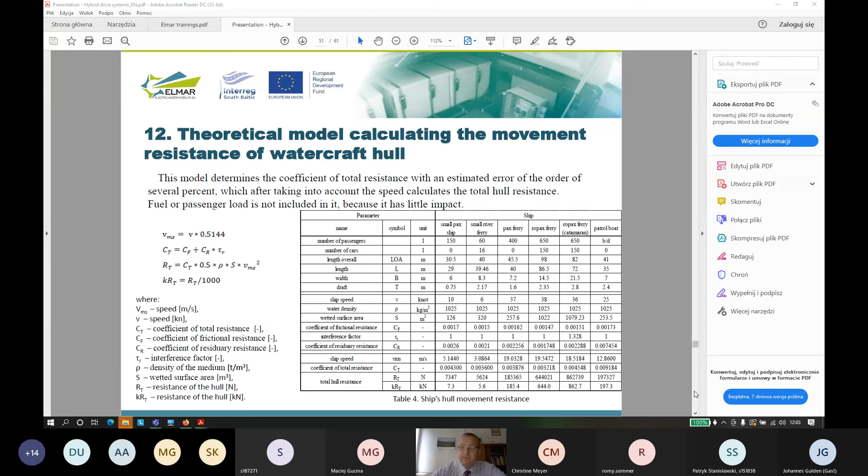Yes, I see. So this model was used for the calculation of the power of the drive of the ship. This is the view of the program where the resistances of the hull were calculated.

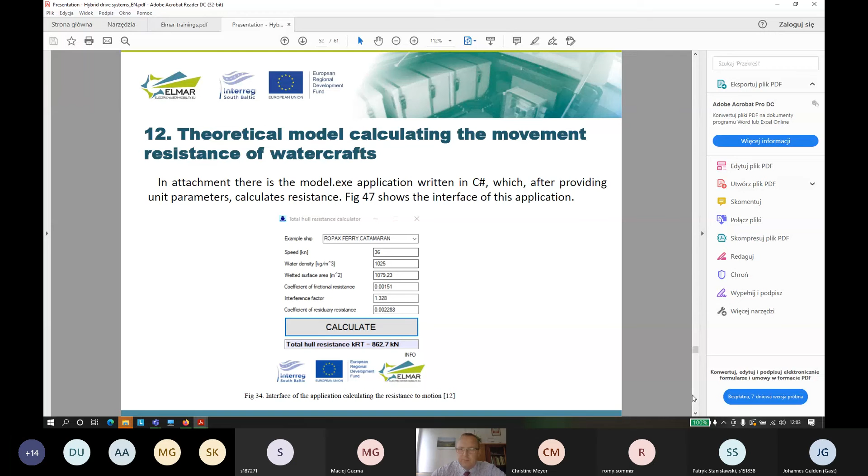Other calculations were done for a very popular ship in Poland, especially in Mazury and Warmia and other parts of Poland, the SP-150. These are the parameters of the ship: maximum speed 20 km per hour, leisure speed 10-12 km per hour, capacity 270 persons, and engine power 140 kilowatts manufactured by Skoda.

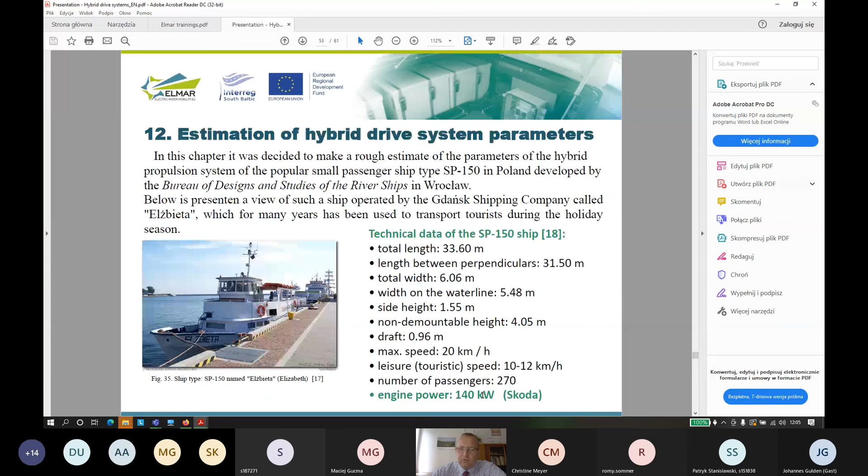When we use the higher speed, acceleration to maximum speed of 20 kilometers per hour and deceleration in 3 minutes, we see that we need 184 kilowatts of temporary power, this is the peak power, and the continuous power at constant speed of 20 kilometers per hour requires 150 kilowatts. When we compare it to the power of the motor, which is 140 kilowatts, we see that these calculations are similar to the power required by the ship.

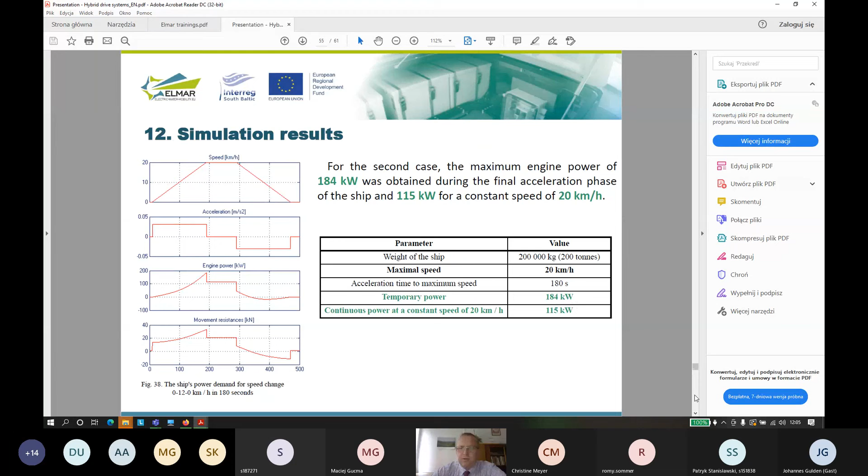Additionally, we proposed a hybrid propulsion system, using the battery from the electric car BMW i3, with a battery capacity at the level of 21 kilowatt hours.

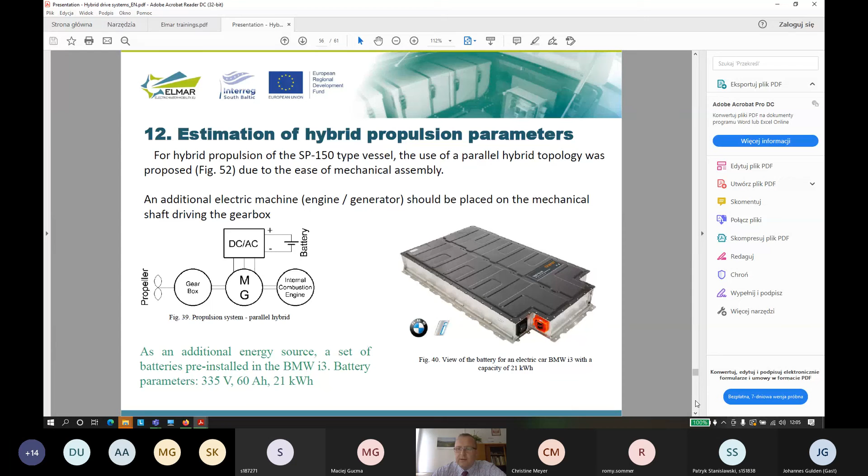Next, we estimate the parameters. At the continuous speed of 12 kilometers per hour, we need 29 kilowatts. Taking into consideration an operational time of 12 hours, we need almost 350 kilowatt hours of energy, which gives us 17 pieces of batteries, and the required electric motor is 30 kilowatts.

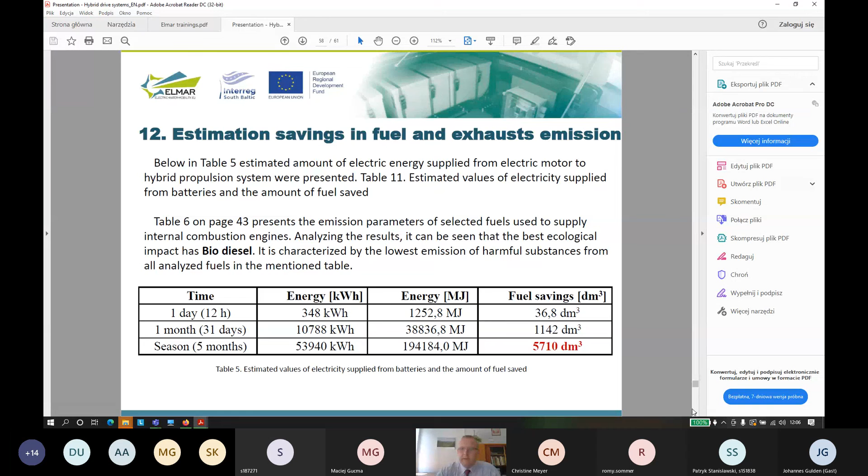Here on the slide, there is an estimation of the fuel savings during the season, 5 months. It's almost 6,000 liters of biodiesel, and according to the information presented by Maciej about emission of harmful substances, we can estimate the final values of harmful substances not emitted to atmosphere. So this is a very nice way to estimate the power of the ship, especially ships which can be used in the Baltic Sea area. So this is our proposition.

So Maciej created the tool for calculation of the hull resistances. I have a model for calculation of all the electric and hybrid drive parameters of the ship. Thank you for this additional explanation. What was this theoretical model for calculating the resistance used for?

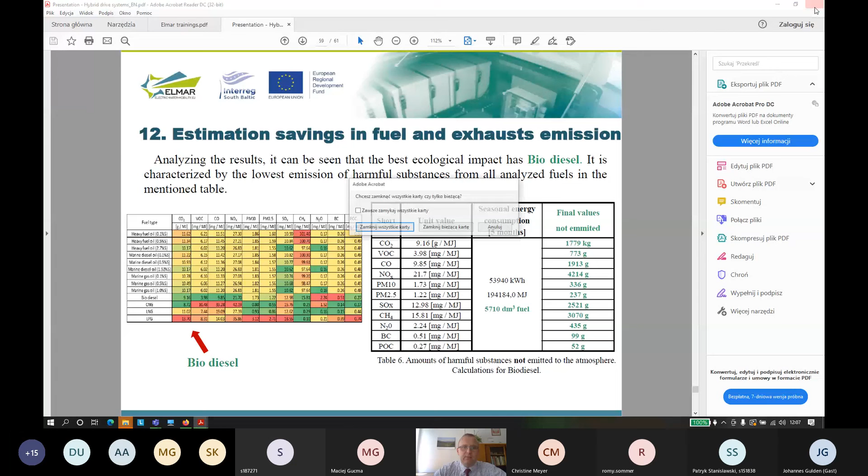Now I would like to say a few words about our speaker. Maciej is a professor of Maritime University of Szczecin. Szczecin is 2-3 hours from Stralsund. The university was established in 1947, offers education for 3,000 students with 12 Bachelor of Science programs, where 2 are in English, and 6 Master of Science programs, where 2 are in English.

The university allows education in the Faculty of Navigation, Faculty of Marine Engineering, Faculty of Engineering and Economics of Transport, Faculty of Computer Science and Communication, and Faculty of Mechatronics and Electrical Engineering. To be honest, Maciej, I don't know which faculty you work in. Navigation. So number 1, first.

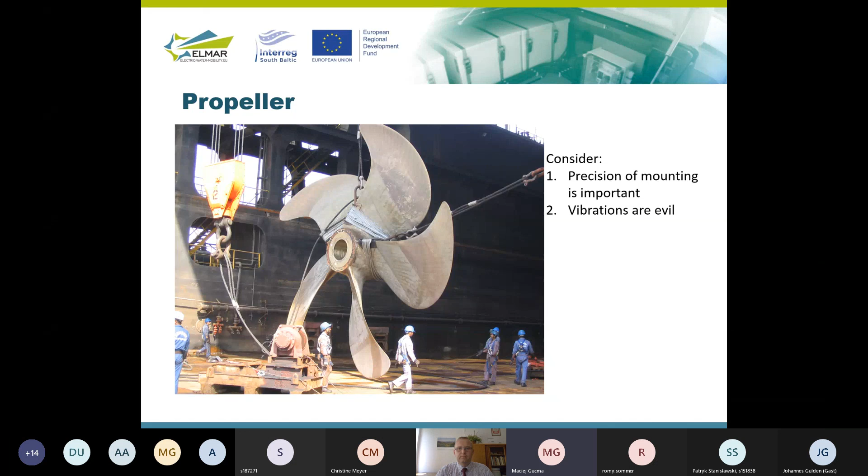Dynamic positioning operations, you have to have full control of the power. Here you don't have control of the power - when it starts rotating, it's really hard to stop it. Variable pitch propellers are easy to stop because you just move the pitch to 0 and it's still rotating, but it's not generating thrust. Of course, efficiency is lower in variable pitch propellers, and complication is far higher, so it's not for every use. You are absolutely right. For small vessels, small crafts, outboard engines, you also get fixed propellers, fixed pitch propellers.

Thank you, thank you for the answer. Does anyone from the audience have a question?